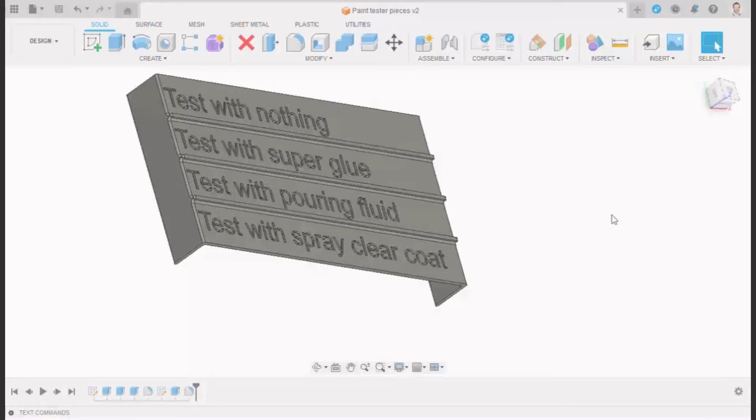So then I went down the road of painting, initially using a paintbrush and then a syringe, which I found to be superior in terms of control and just ease of use. But for some projects, I needed to use a white filament so that the LED lights inside of the device could be seen from the outside.

To paint text on, I wanted to use black paint, but I had issues with black paint bleeding within the print. I tried to seal it using initially a clear coat spray paint. I also tried out super glue, and then eventually I found this acrylic-based pouring fluid, which I've been using ever since. But I wanted to do a side-by-side comparison of prints in two orientations, so I designed these little test pieces and printed them out.

If I were to paint these right now, you would see in between the layer lines some bleeding of that paint. I'm going to do one test on each with nothing, so that'll be the control. I'll do one test with super glue, I'll do one test with this pouring fluid, and I'll do one test with this clear coat spray paint. If you are going to use super glue, I would recommend using the original super glue and not the gel, because you want it to soak into the voids to fill those rather than just filling up the letters.

So next we'll do this pouring fluid. It dries clear, dries pretty quickly, and is super easy to apply. I end up just using a brush to apply it. And the final test we'll do with our spray paint clear coat. I'll give that some time to dry, and then I'll come back and paint them.

Okay, so it's been about an hour since we did this. The spray paint is dry, the pouring fluid is also dry, but the super glue is still wet. So we're going to have to wait a bit longer before we can start painting. So we're here 2 hours after the initial treatment, and the super glue is still wet. So I'm going to try to dab some of that glue out of there with this paper towel. You can see it's saturating that paper towel.

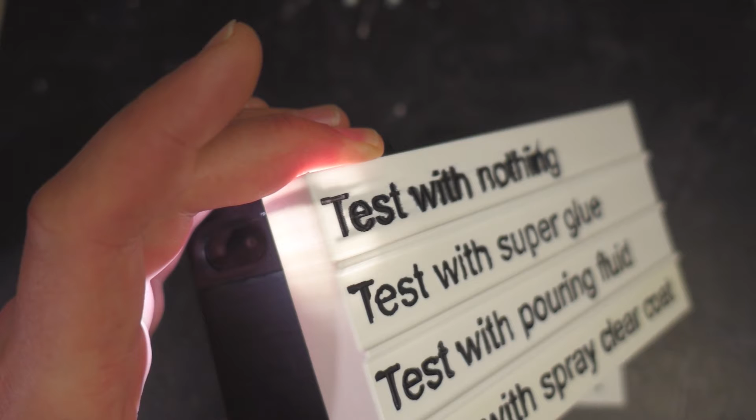The other thing that we should check is bleeding within the print. There is definitely bleeding in this one. This will be more evident after we clean up the front. But you can see between with and nothing, there's some bleeding across there. You can see it there as well, all around test, and it actually wraps around the back side here. That is paint that bled within the print.

And this could be because of my printer, just that I have voids in there, but with any FDM printer, you're going to have some sort of gaps in there. So the next thing we're going to do is clean these up and see which one takes longer to clean up, and then compare the final results as well.

So I like to use a razor blade, and I just kind of scrape off the top. Versus sanding, you generate a bit more heat with sanding, and you can get to the melting point of the PLA, which isn't very high, and then you start messing with the surface a bit more.

And of course, scraping with a blade, you're not going to leave a perfect surface finish, and if I want it to look good after I finish scraping, then I'll go back and do the whole thing with some sandpaper and then get a more consistent finish. But yeah, to be able to clean these exclusively with sandpaper, you're going to have to remove a decent bit of material. Alright, so I'm going to call that good enough.

So now we can see even more clearly that bleeding between the layer lines within the print itself. So there's some down here, around the word clear, around the word spray, and also around the test, wrapping around the back.

Pouring fluid and super glue are both nice and clean. The control, with no sealant, has some bleeding, especially around "test", and again it bleeds around the back. Without the light it's not super evident, and on some prints it's better or worse than others. Here it's not super evident, but it is there and it is noticeable.

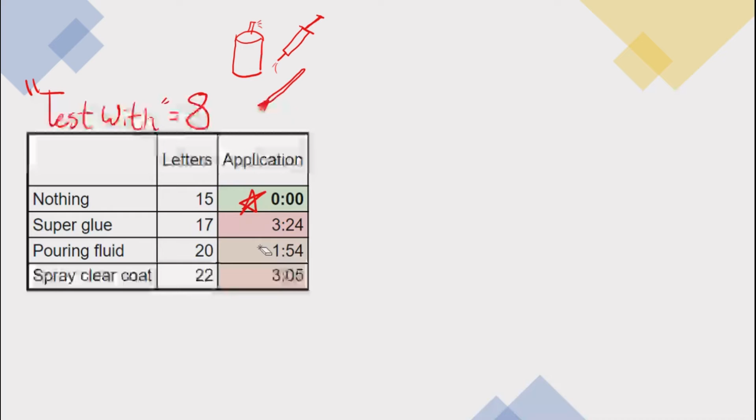The results are in, and I want to preface this by saying this is not a perfect test, and I recognize that. I did consider the number of letters and took an average for that: 7 letters plus 8 letters from test with. In terms of application, the control, not applying any sealant, was of course the fastest, and pouring fluid was second. Super glue was pretty slow; the bottle I used was relatively stiff, which made it hard to apply. And with the spray clear coat, most of the time was spent taping off the print. You wouldn't necessarily need to do that in every case though.

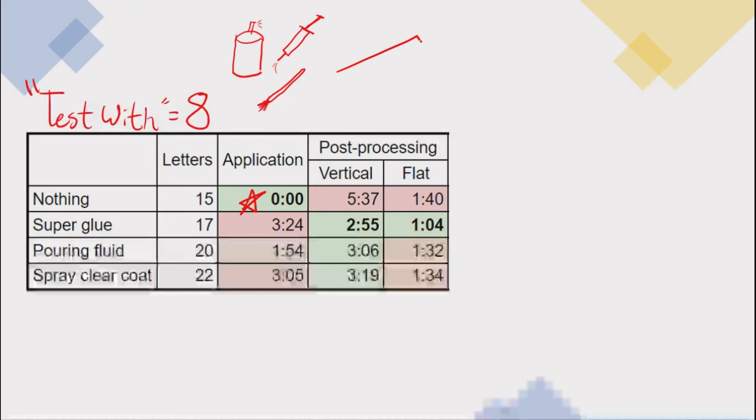In terms of post-processing, super glue was surprisingly the fastest, taking the least amount of time for both the vertical and flat. And you can see the control on the vertical print took a ton of time to clean up because that paint just seeped into every little layer line. So on average, the total time per letter was the least for pouring fluid and the most for the control, with spray clear coat coming in a close second.

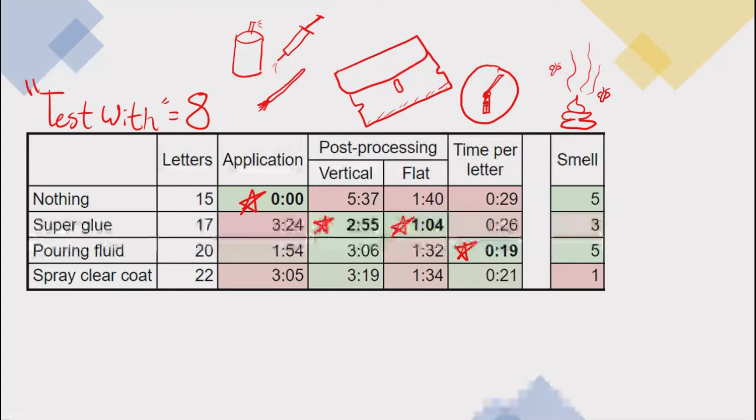Other factors to consider are the smell. The spray clear coat had a really strong smell, spray paint obviously. The control, applying nothing, had no smell, and pouring fluid also had no smell. The super glue did have a bit of a smell, which I don't normally notice with super glue.

And then finally, comparing cost, the control, adding nothing, costs nothing. Pouring fluid is so cheap and you use very little. Super glue, if I had used one of those small bottles that costs like $1 or €1, I might have used that entire bottle for that print, so not super cheap. Same thing with the spray clear coat, because there's a lot of waste. You can end up going through a can pretty quick, depending on how much you're doing, and it's $7 or something per can.

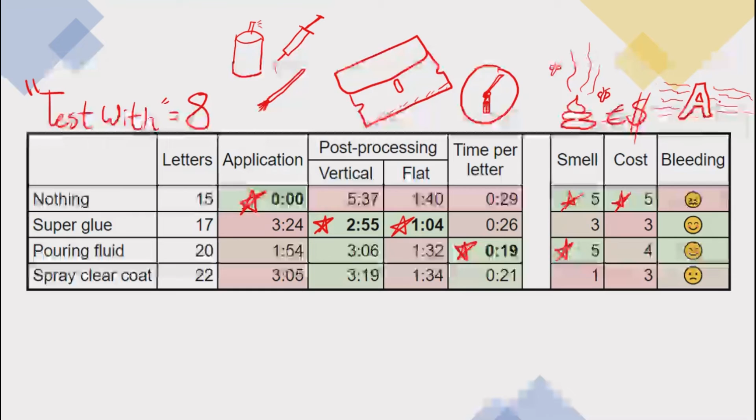The other factor is whether the paint bled within the print or not. Without any sealant, the control paint did bleed, and with the spray clear coat the paint also bled within the print, and if it's inside, no amount of sanding is going to take that off. Painting white paint on top is also, in my opinion, not an option. So as far as I see it, if it's visible, either you live with it or you reprint. It's not worth the risk to me to paint, especially black paint on a white print, without sealing beforehand.

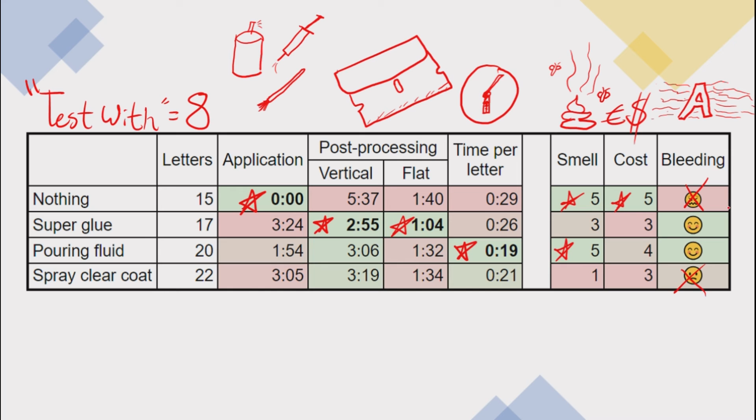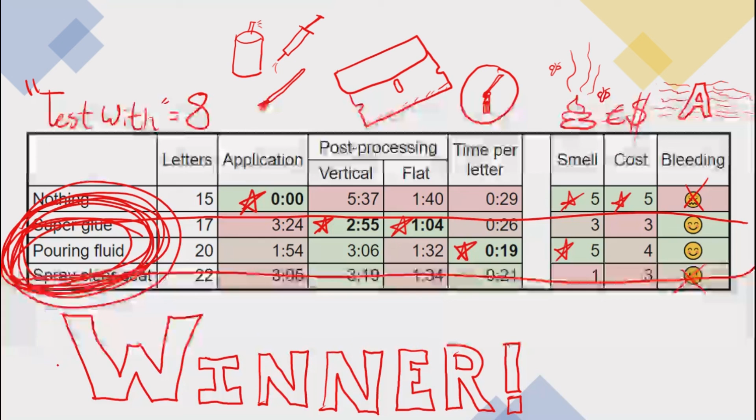And it doesn't take that long with the pouring fluid. It dries relatively quickly. So in the end, I will continue using pouring fluid to seal the prints. It was the fastest per letter and also had no smell, and even though it wasn't the cheapest, the time savings makes it worth it for sure.

There are all kinds of methods for painting embossed text on 3D prints. Like I mentioned at the beginning, I've used silicone before. I've also used hot glue. I've seen others using melted crayon wax.